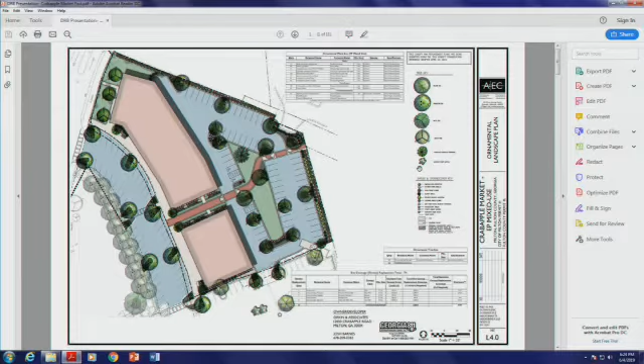Okay, yes, that's absolutely good. I'll second that one as well. All in favor? Aye. Okay, great, thank you very much. Thank you, Steve.

So Chairman, just to make sure, that was considered to be 7A, not 7D? That was 7A, it was moved to 7A, correct.

All right, so now, just so let me reiterate, 7B will now be Braeburn Townhomes, 7C will be Crabapple Market Green Amphitheater, 7D is Crabapple Market Outdoor Canopy, and E is LDP. Okay, so let's go to Braeburn Townhomes, Phase 3 Architecture, I believe that's Rob.

I'm Rob Beecham, 500 Mill Creek Road in Woodstock, Georgia. It's good to be back with you again to look at this project.

I just wanted to comment how much of a pleasure it is, and I mean this from the bottom of my heart, working with a jurisdiction that has the best interest of the community and works in a manner to produce a great project. I know we've gotten feedback on this from various people, relayed through Bob, and in the end that kind of dialogue, I believe, produces a better product.

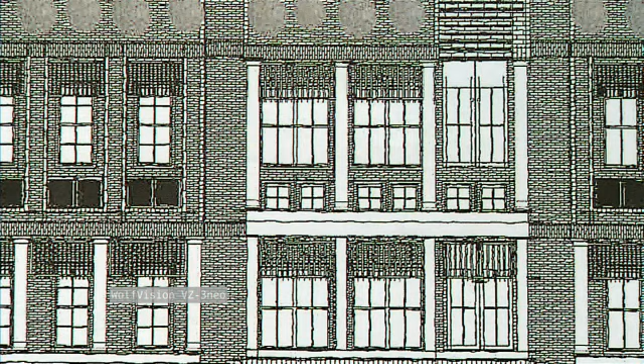These are buildings that are the proposed projects for the Orkin development. They're similar style, being Greek Revival, and of course they're of a commercial size scale, which is why when I initially met with Bob, we talked about these particular three townhomes being a transitional building, seeing that they were adjacent to commercial property.

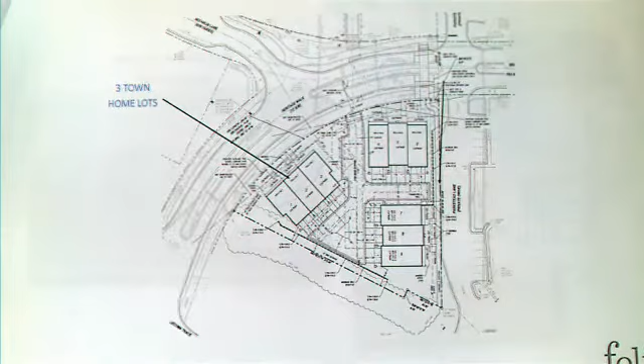The next page again is just showing an idea of how the streetscape may work. Mr. Orkin's buildings probably will be somewhere around 50 feet above street level.

Our property that's immediately adjacent, we sit approximately 10 feet. Our first floor elevation is about 10 feet below his, and our building's overall height is another 10. So we're probably looking at the scale of this building being 20 feet below his maximum height.

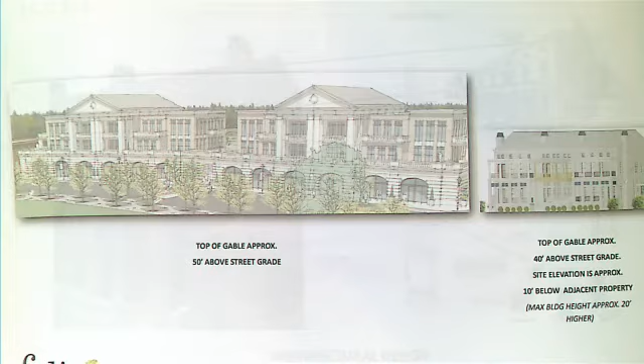I just wanted to show that to you so you understood the scale and the look as you came down the street. Our next page is some of the elements I've worked with Bob on, working with the UDC design guidelines in Greek Revival.

This page copied out of the UDC shows some of the highlighted elements of Greek Revival, from the low-pitched roof, the Doric columns, the bold entablature, the attic windows. Some of these elements, when we were working on this design, we pulled directly from the UDC.

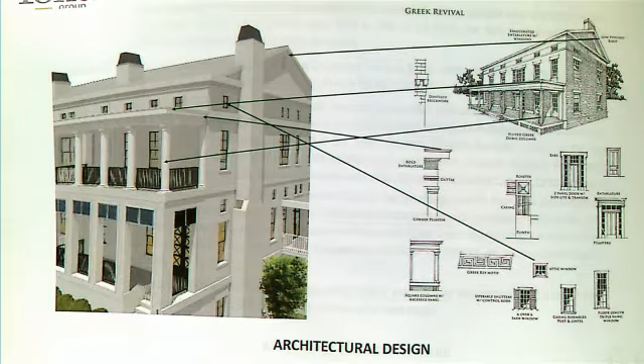Next page is additional information from the UDC, which we used in our design. I'll point out just a few underlying things. One is its forms are boxy with consistent cornice lines and low-pitched gabled or hipped roofs. A lot of different information, but the classical details are large and bold, columns being the main hallmark of the style, and paint colors being typically white, cream, gray, with window sashes white or black. So we're working our best to comply with guidelines presented in the UDC.

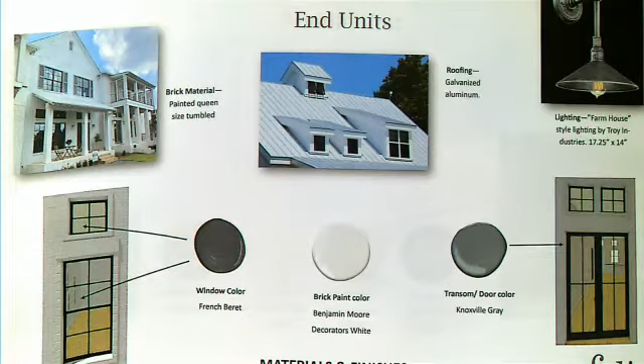The next page is our materials and finishes. What we have planned is 2 end units and 1 interior unit, so these are some of the design elements for the end units. I'm showing the windows and transoms in a darker color called French Beret, brick color painted in a Benjamin Moore color called Decorator's White, and our exterior doors in a slightly different color, Benjamin Moore Knoxville Gray.

With the addition of the gabled roof from the previous versions, we're proposing using galvanized aluminum roofing and lighting that would be similar to this style lighting.

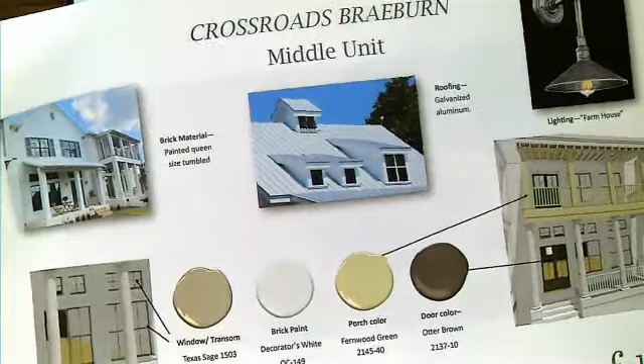The next presentation page shows our middle unit, and we've added a little bit softer color to this particular unit, with the windows and transoms in Texas sage. The brick color is the same since it's a monolithic building, so it's impossible to change base colors between the 3 units, and then the other colors as mentioned.

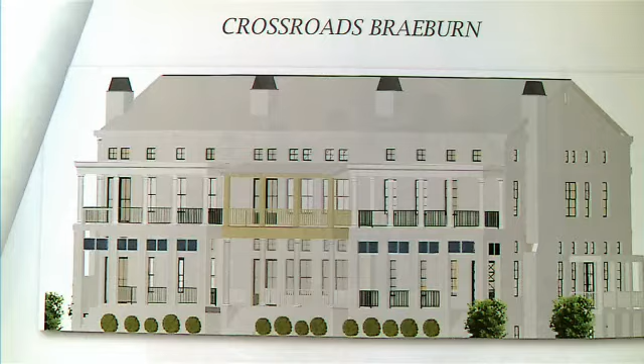The next page shows our revised front elevation, which is classic Greek Revival. You'll notice we've changed the column details and the roof detail, adding a low-pitched roof. What's hard to see is we still have the rooftop walkout terraces on all 3 units, but they're hidden nicely behind it, so from 3 sides of the structure there's no apparent rooftop terrace.

I've also increased the size of the side porches, making them even more usable, with the front porches being, I believe, 8 feet deep, Bob, but I think that sounds right.

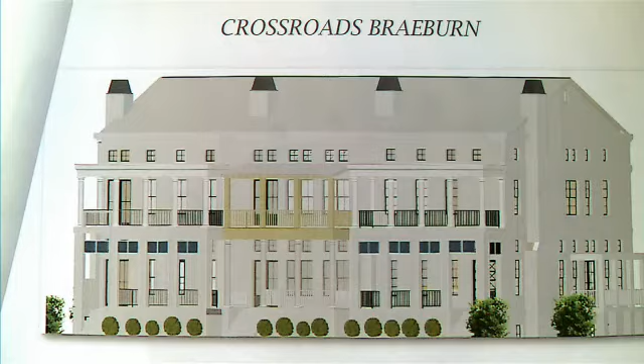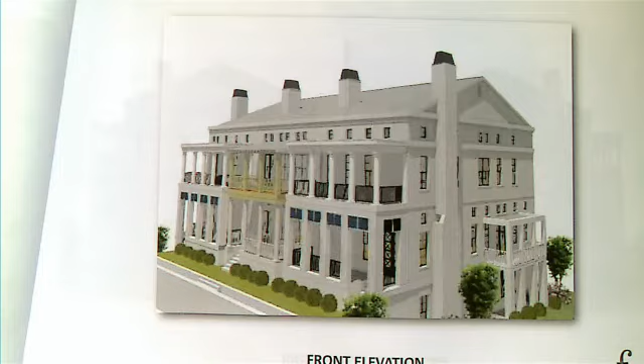Another perspective showing a little bit of angled view of the front, so you can see the depth of the porches, and you can start to see the entablatures. The top brick entablature has almost a 16-inch step-out, Tim, so I'm working to put the gutter system and all of the cornice detail in behind that top brick detail, so it's a really clean, wonderful look. I think it's going to be very classical and very elegant.

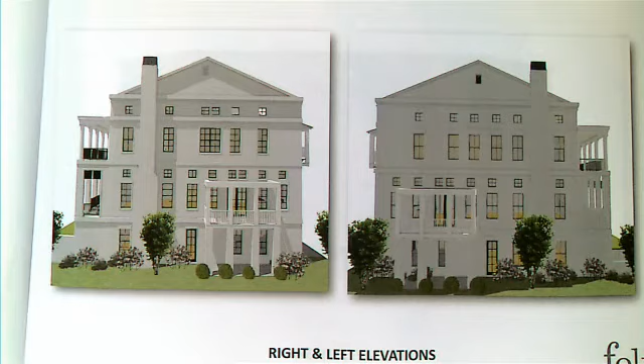Next page shows both of our side elevations, which are virtually identical. I've presented 2 different window patterns on the units, so one unit would have a 4/4 window pattern, and the other would have a 2/2. But basically the side porch is full finished lower level, and the porch details remain the same.

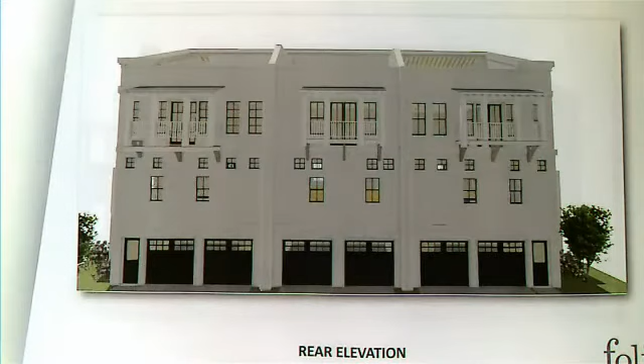The rear elevation shows the depiction of the rooftop terrace, which is hard to see from that elevation or detail, but you can see that it's hidden and only visible from the rear side, which has a 42-inch parapet wall. So you have to be at quite a distance off to get the right angle to see the rooftop terrace. All 3 units have rear porches as well as rear entry garages.

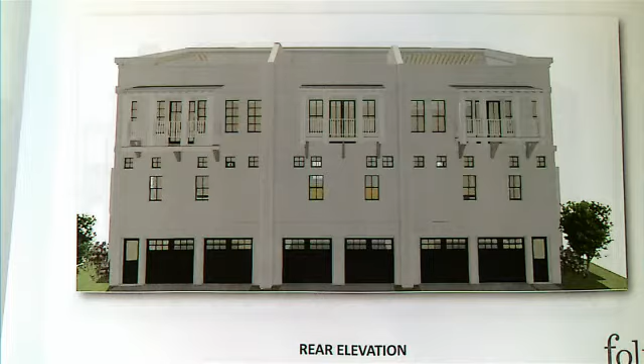The next page shows a little bit better view of how the rooftop terraces are cut into the roof, and I think they hide nicely. It did not affect the overall use of those rooftop terraces.

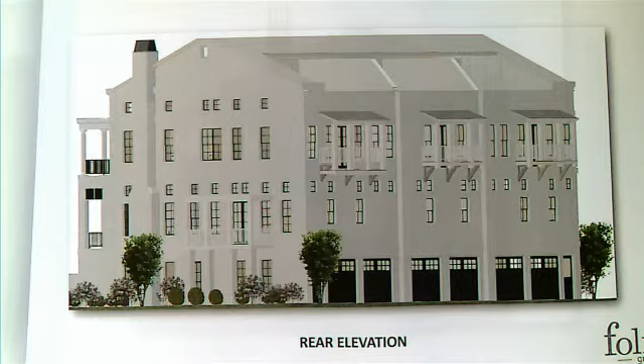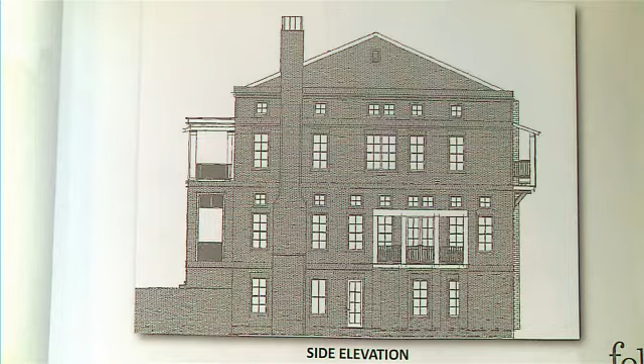I gave you one more page in a line detail, so you can see the brick detail work and the detail on the cornice and front porches a little bit easier from this view. That gives you a better idea of the amount of detail going into the project. So any questions that I could answer?

Any questions from the board?

I just want to make a comment. I love the use of outdoor living spaces on these more, because I can imagine myself, at least for the building we're approving, sitting on the second story of the front, listening to Milton's Cuisine, the music coming off there, or going to the back of my house and listening to music coming off of the amphitheater. And I think that's what a lot of our townhouses miss here, is a use of outdoor living space. And you have 1, 2, 3, 4, 5. Yeah, we have 5 outdoor living spaces. And I think that's really something to say, because that's what we want here.

We want activity, right? We want people to be out, sitting on their porch, enjoying music and engaging with people. So I think that's a great design.

Thank you. I appreciate all of the detail from when you presented the last time to this time. Well, the very first time we brought it in, we were just trying to get started, and they spent like 3 days on it. I apologize, and I won't come back again not fully prepared. But I love the idea of collaborative work, and it's what makes cities great. There are other cities we work in who are obstructive, and when they're obstructive, it produces bad results rather than working together to produce great results. I think this is a great example of a project that's improved because of feedback.

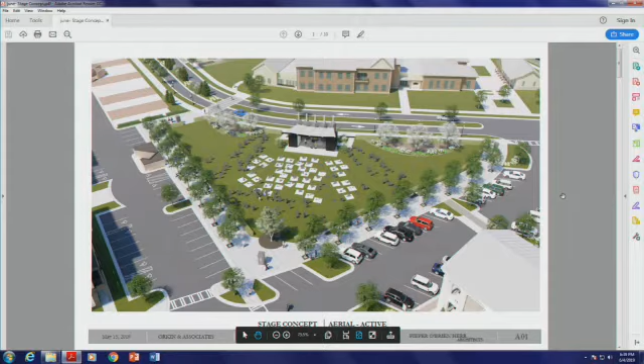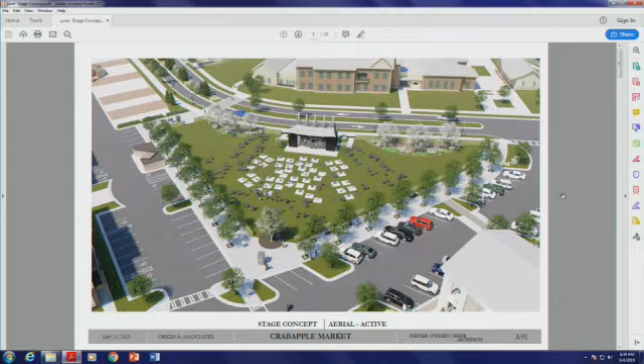Good evening, Board. Charles O'Brien with Piper O'Brien Architects. I'm representing Orkin and Associates on this project. The project before you will give the ability to have a performance venue permanently installed on the green immediately behind you in location. The addition of that green will continue to activate the heart of Crabapple, and at times will transition the green from a passive-only park to an active destination.

We reviewed several site configurations for this project, as well as several stage designs, and we ended up with this one being the best. We have the stage itself oriented on an axis with the corner of the park, if you see my cursor. So it's presenting itself right to the intersection, and it also uses the City Hall as a backdrop from behind it. So, yep, it would just be right there.

We went to the next page here. The stage itself is designed to have a canopy covering over top of the performers, not only from a shade perspective, but also from inclement weather, pop-up thunderstorms or whatnot. And then the two volumes on the sides would provide some space off stage, as it were, just to be somewhere that's not on stage or off stage. It's somewhere for the performers to be. The stage itself is elevated 2 feet off of the grade of the green.

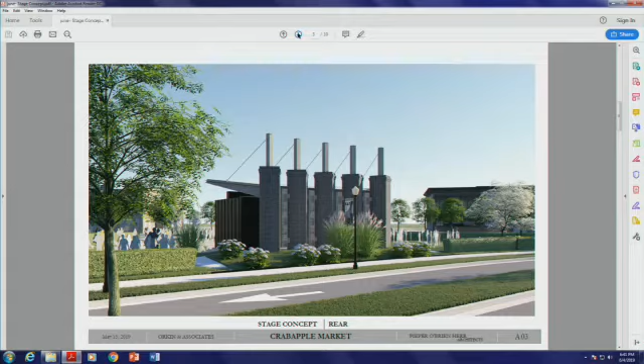From a site plan perspective, we're planning on ringing the entire green with bushes to help with audience control, so that we would have some strategic locations for the audience to come and go through those openings in the bushes. So the 25-foot wide openings on 2 sides and then a 12-foot wide section on the other side.

We also have some sidewalks from an access point of view to the back of the stage. That would be where the performers would come and go, and maybe some equipment could be loaded in through those doors on the sides.

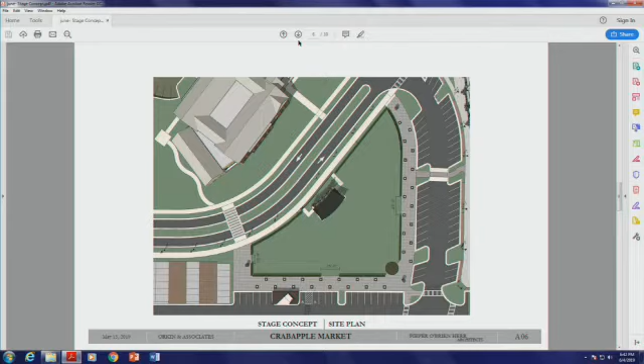Here's a little floor plan of what that stage could look like with the west wing and the east wing. And you also see the way those doors are pocketing themselves onto the sides, left and right. So when it's in an active mode, those doors kind of slide themselves open and are fairly hidden from view.

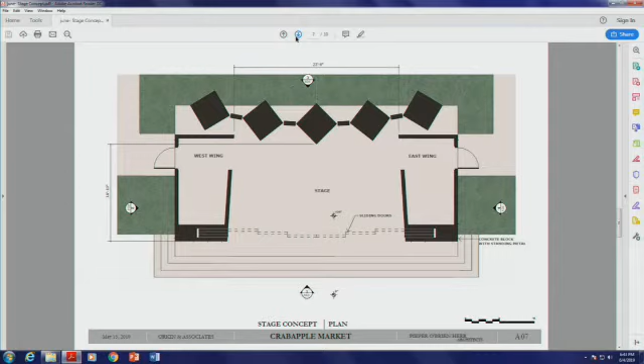Here's an elevation of the front with the doors in the open position and the doors in the closed position.

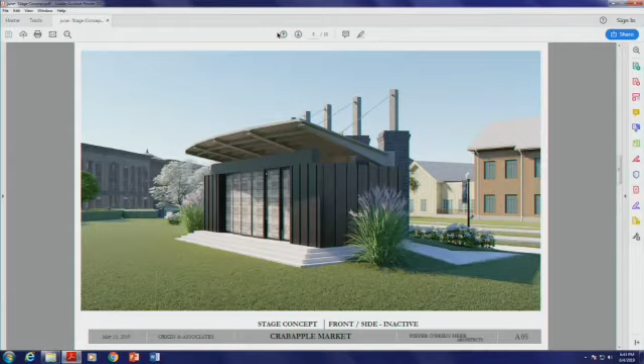In a vacuum, I love this design. I'm wondering, in the context of all those architectural styles that we've been considering, is this cable and steel tube column really compatible? And that's a subjective thing, and it's an architectural question. That doesn't strike me as fitting the flavor of the architectural styles within this form-based code.

I just want to tell the board that staff has not had a chance to review this. They put it on the agenda for final review, but we haven't had a chance to really have any dialogue back and forth. So I had a million questions too. Normally it's reviewed by staff before, but in this case, this particular building has not.

I'd say it looks pretty bulky for the area that it is. Is there any, as far as the design goes, did you mean to close out? When I think of an amphitheater, I think of you can see it kind of from all angles coming in. It seems pretty closed off with the band kind of being tucked back in, or whoever's performing. Is there any reason for that at that location?

There's a concern about sound and being able to control that sound and really focus it out towards the green, so it's not just emanating everywhere in this area. So it was kind of away from the residences. Intentional? Yeah, a little bit.

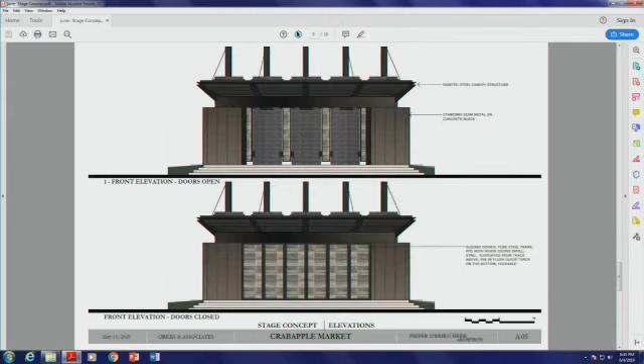I sort of agree on the cable look. I mean, it's heavy. I'm looking back here, that's going to be 20 feet. How tall is that? Are those cables? They're probably 25 feet tall. Yes, I believe so, that's about right.

I thought of it, and I think it's better than just the canvas top on a couple of posts that you see in a lot of amphitheater places. I think it's a heck of a lot better than that. It just seems bulky, but there's some equipment that they want to store in here permanently or relatively permanently, so they don't have to continuously move it in and out. So having it that open, the initial design actually was very open, a very light look like what you're describing, and I agree that would be the ideal. It's just from a functional standpoint, and what they want to be able to use it for in terms of storing some equipment long-term, it needed to have some more enclosure to it.

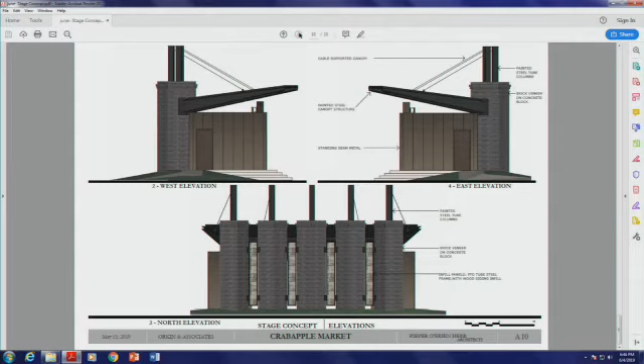I think I would agree with what everybody said. Yeah, I would too. Architecturally, especially across from City Hall, which is very Milton, I would propose - I would make a motion to table, postpone, defer - Bob will coach me on the right word - defer 7C for a month and let the city's architect work with you some. I don't love the cables either, and the height, everything that my other board members here have said, I agree on. And I'd just like for you to work on this a month and come back and see us.

It's great, love the amphitheater, want to hurry up and build it. It's going to be fun, but I'd just make that motion on item 7C to defer for 1 month.

Second. And then if you like, you can have discussion. Yeah, I just want to make some more comments. After a motion and a second, then you can have internal discussion. Go ahead. Should I make comments now, or do we need to? Yes, comments.

I don't know how often this is going to be used, hopefully a lot. It looks like it's just going to be a storage building in the middle of the green. That's what it looks like. If that's your intent, to store things there, okay, but it's not going to look like an open amphitheater where people say, ooh, I can perform there. That's not what it looks like to me.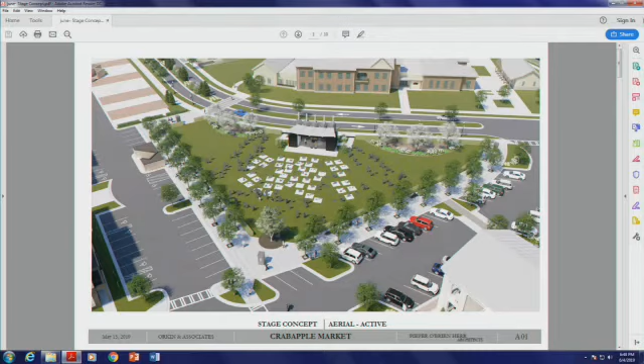It's flanked by City Hall and the original buildings, and it's very different from either one of those. I'm one that likes to see a gentle transition. Even though that may not be form-based code, we've got a green that's beautiful, and we're looking at two distinct buildings here, so I'd like to see you work to get that. Maybe I'm wanting to see more of a fire station and police station look, like the work that came to us a couple of months ago. That would really make me happy to see that direction.

Yeah, I would agree with that. Even looking at the buildings in the back, maybe pulling out some of these side buildings, they've got a lighter color. Maybe pulling that into this might be more consistent with the overall design. That's what I was thinking, along the lines of your comment.

Any other comments? Any comments from the community? So there is a motion on the floor. If there's no comments, let's take a vote. Did we get a second? We had a second, yes. So, just discussion, and now you can vote for a deferral. All in favor of the deferral? Aye. Aye. Aye.

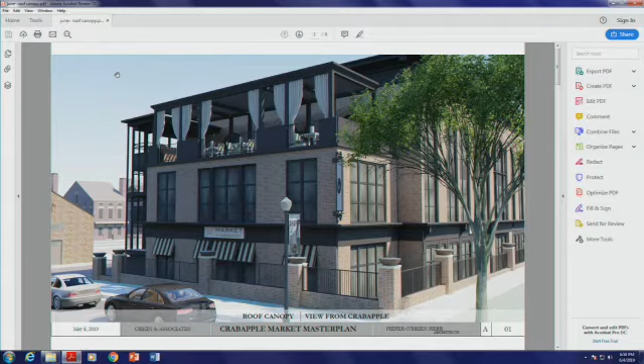Okay, our next item, 7D, Crabapple Market Outdoor Canopy, final review. Please state your name and address again. Charles O'Brien, Pieper O'Brien Herr Architects, 3000 Royal Boulevard South, Alpharetta.

The image in front of you is the same as in the package. This is to add a trellis over the existing roof patio that's already there on Building E, on the top floor, you see Laurel and May down at the bottom here, just to give you a location. This has nothing to do with Laurel and May. The tenant would be adjacent here. They want to use this as a roof patio, and they need a little bit of covering to make it more palatable out there in the sunlight. So we've got several views here.

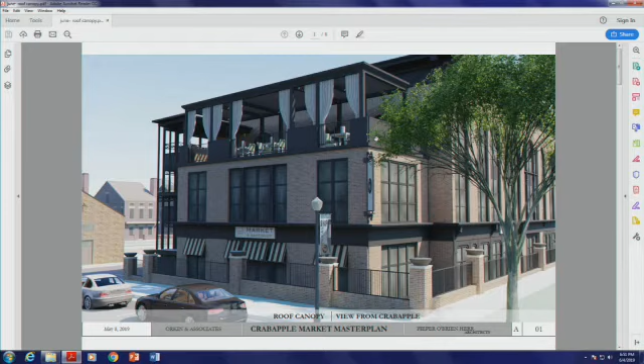It's really just a sun structure. It's not providing any sort of rain protection.

After a while, I'd have to tell you, it looks great. And I hate being in the sun. When I was 30, I loved the sun, but now I can't be in the sun. That's right, so what a great way to improve it. And it's so good looking, you can't even tell it wasn't there originally. That's right, so I think it's great. Yeah, it looks really nice. Yeah, it's a really nice look.

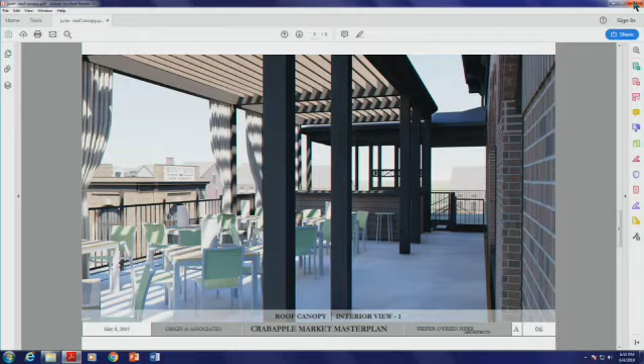I'd make a motion to approve item 7D as submitted. Is there a second? Any public comment? Any comments from the public? Any other questions from the board? All right, so there's a second for the motion. All in favor of approval? Aye. Aye. Thank you.

Okay, our last final review is Aldi LDP, 12990 Highway 9.

State your name. Good evening, Robert Oakes, I'm the real estate director for Aldi, 1597 Dry Pond Road, Jefferson, Georgia. Aldi is proposing an expansion to its existing building located at 12990 Highway 9. It's approximately a 2,000 square foot expansion on the north end of the building, approximately 17 feet beyond the end of the current structure. I'd be happy to answer any questions the board has.